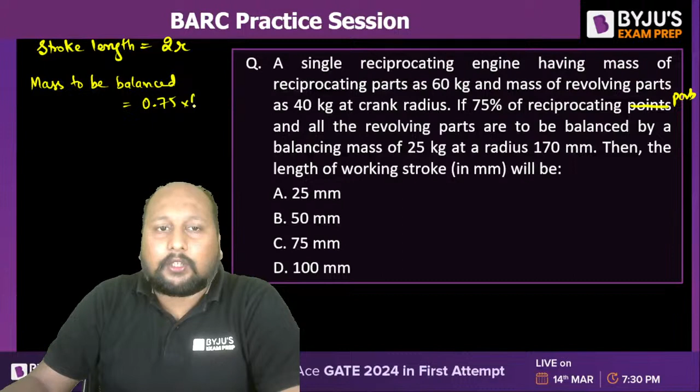Now they are saying that you need to balance 75% of the reciprocating part and the complete revolving part. So the mass to be balanced will be equal to 0.75 of the reciprocating part, that is 60 kg, plus the entire revolving part. So 0.75 into 60 plus 40, what's the value you're having? Anyone? 0.75 into 60 is 45, plus 40, that is 85 kg. Are we getting this to be 85? Fine. So now we need to balance this much mass at crank radius.

They're simply saying you need to go for complete balancing, not any partial balancing. So we can say m into r into omega square is equal to mb into rb into omega square. Now mb is given as 25 kg, and 170 mm is the radius. So 85 into r, omega square gets cancelled out, is equal to 25 into 170. From here I can get the value of r, and then stroke length will be equal to twice of r. See the options and tell me the correct answer.

What's the value of radius you're getting? Quickly. 100. Very good, very good. We're getting r equal to 25 into 170 divided by 85. So this is coming out to 50 mm, right? If this is 50 mm, the stroke will be equal to 100 mm. So the length of the working stroke will be simply option D, 100 mm. Is this clear?

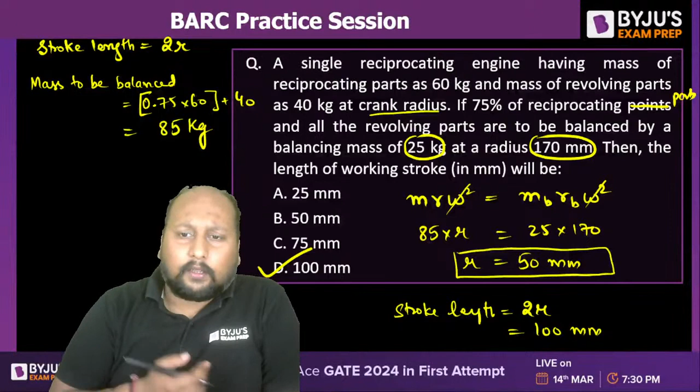Okay, so the next question on your screen is from the gyroscope. An airplane flying at 240 km per hour turns left and completes a quarter circle of 60 meter radius. The mass of the rotary engine and the plane's propeller is 450 kg with a radius of gyration of 320 mm. The engine speed is 2000 rpm clockwise when viewed from the rear. Determine the gyroscopic couple on the aircraft. Okay, chalo, who will be telling me the answer?

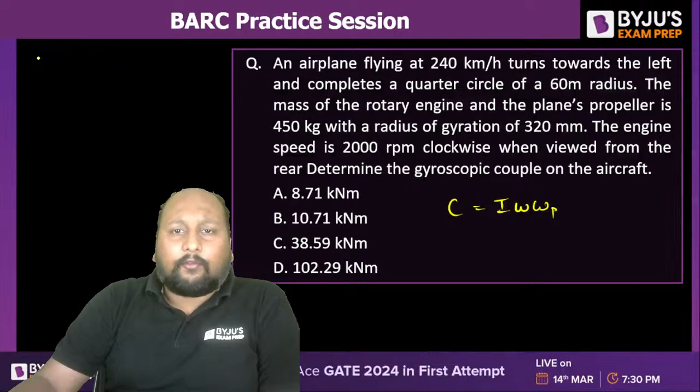It's simple, direct. You need to calculate the gyroscopic couple, that is equal to I into omega into omega p. What's the value of omega? That is 2 pi into 2000 by 60 radian per second. How do we calculate omega p? That is equal to velocity by r, v by r. The velocity is 240 km per hour; convert it into meter per second. So 240 into 1000 by 3600, divided by 60. This gives omega p, and I comes from the mass and radius of gyration given.

So place it: 450 into 0.32 square into 2 pi into 2000 by 60 into 240 into 1000 divided by 3600 into 60. Solve it and you'll be getting something in kilonewton meters. Try to see the unit. Tell me the answer in kilonewton meter. Option A 8.71, option B 10.71, option C 38.59, or option D 102.29. What is the correct answer?

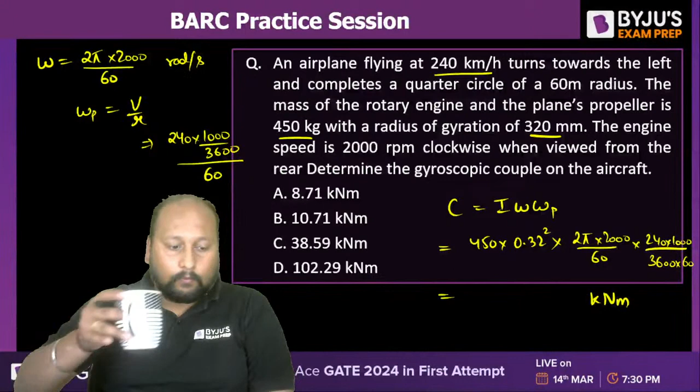Very good, Saurabh. I'm getting some responses from Saurabh and Roshan. Are you getting option B? 10.71.

10.71 or something like this, kilonewton meter. Are we getting option B as the correct answer? Only the calculation part is left. Make sure you're dividing it by 1000 also, in order to convert this into kilonewton meter. Okay, option B. Very good. 10.712, somewhere around that you are getting.

Okay. Yes. Correct. Fire. What's your name? Fire, Roshan, Saurabh, Unstoppable. We are having unique names in the comment section.

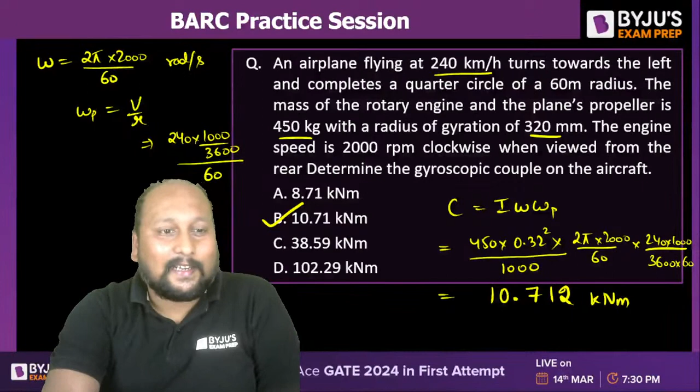Okay, option B is the correct answer. Chaliye, next question on the screen. Again from vibration, let's see. The mass of a single degree damped vibrating system is 8 kgs. If the amplitude of vibration reduces to 1/16th of its initial value after 4 oscillations, that means they are simply saying x4/x0 = 1/16. Then what is the ratio of the amplitude of the third oscillation to its initial value?

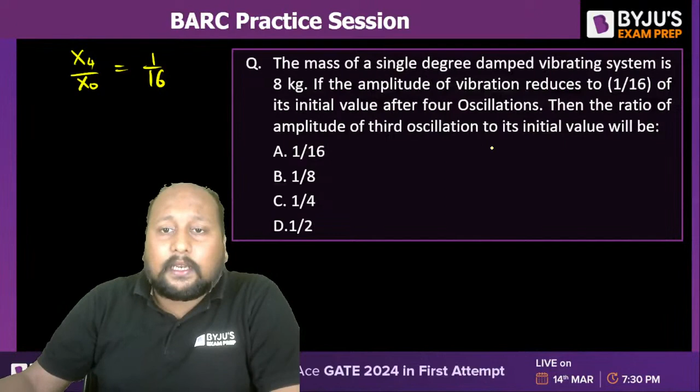That means they're asking the value of x3/x0. Is it coming out to 1/16? Definitely it won't be 1/16; it will be higher than that. Either it will be B, C or D. A you can directly eliminate. You have solved these types of questions so many times in damped vibration. The consecutive ratio is always constant. Okay. Chalo.

What is the value of x3/x0? We know x4/x0 can be written as x4/x3 into x3/x2 into x2/x1 into x1/x0. So this is (x1/x0) to the power 4, because the consecutive ratios will always be the same. That is equal to 1/16. So from here I'm getting x1/x0 = 1/2. But they're asking the value of x3/x0.

So x3/x0 can be written as (x1/x0) whole cube, or 1/2 whole cube, that is 1/8. We are getting option B as the correct answer. No calculator required. Frankly speaking, if you are correct with the logic and the concept, for some questions you won't require calculators. You can directly get the answers. Option B is the correct answer.

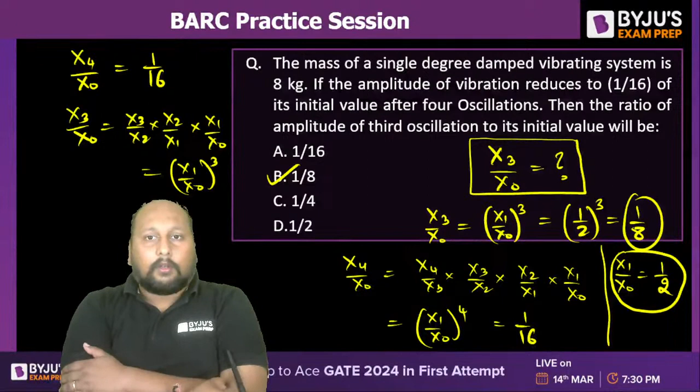Yes, Roshan, Saurabh, Pankaj, I hope this is clear. Is this clear? Option B. Can we proceed to the next problem? It's very important, I need a response from all of you, because you can expect these kinds of very easy questions. The question level is not difficult; the approach makes it difficult or easy.

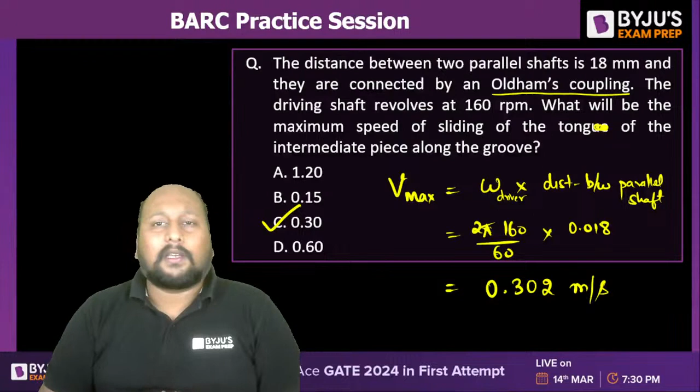Roshan is getting option C. I think we are getting 0.302 meter per second. Round off to option C. Perfect. Okay. Omega of the driver into the distance between the parallel shafts. That's a simple formulation. Those who know, you can apply. Those who don't know, they'll be skipping and losing a very easy 3 marks question. Okay. Chalo, next question on your screen.

Very easy. This question, I would rather say, should be from mechanics, but yes, you can apply the concept of theory of machine also. A wheel of radius r rolls without slipping on a horizontal surface as shown below. The velocity of the center of mass is 8 meter per second in horizontal direction towards right. Towards right means simply like this. Let me use a different color. This is the velocity 8 meter per second and rolling without slip is happening, right?

What will be the magnitude of the velocity at point Q? Quickly, VQ value. Those who know the concept, it will hardly take 30 seconds to answer this question. Quickly.

What is the velocity at this point, VQ? You can use the concept of velocity triangle, or you can use the concept of mechanics. I think mechanics will be very easy. Now, whenever we are having rolling without slip, its I-center will be located at the point of contact. That is, O is the I-center.

So if I want to calculate the absolute velocity, we need to calculate this distance and multiply it by omega. That's it. So the velocity at point Q will be equal to OQ into omega, right? What is distance OQ? They have not given that distance, right? Let me show you that distance.

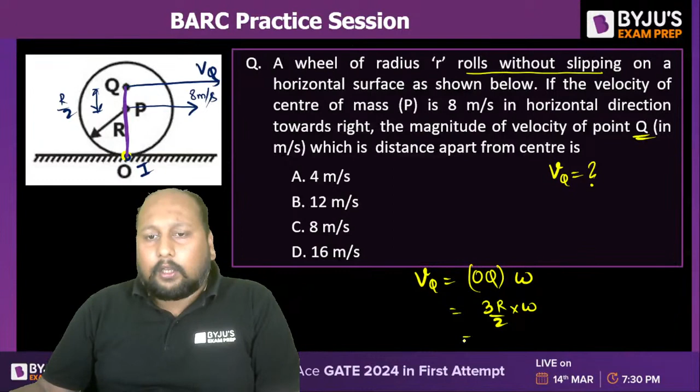What is R omega? Because this is rolling without slip, V is equal to R omega. So we can simply say this is equal to 3 by 2 into V. V is 8 meter per second. So 3 by 2 into 8 gives 12 meter per second. Option B is the correct answer.

Because we know that about the I-center, the body is making a pure rotational motion. So if you want to calculate the absolute velocity, you only have to identify the distance from the I-center to that point, and multiply by omega. R omega is equal to V is the condition for rolling without slip.

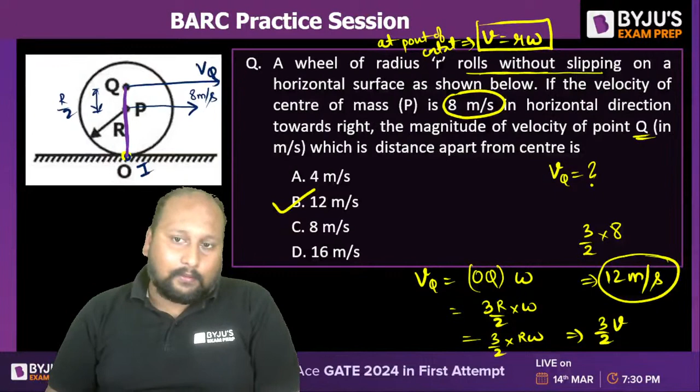You can use that concept and directly get it. Option B is the correct answer. 3 by 2 into 8 simply makes the answer 12 meter per second.

Next question. A rigid rod of length 2 meter is resting at an angle of 30 degree. Various times we have solved these kinds of questions, right? The point B is dragged with a velocity of 8 meter per second towards right. What is the magnitude of the velocity V of point A as it moves along the wall without losing the contact? Quickly, what will be the answer?

They're asking you this velocity, VA. This is given as 8 meter per second. This is 90 degree, so we can use the concept of I-center. The I-center will be simply located at this point. So we can say VA is equal to AI into omega, and VB is equal to BI into omega.

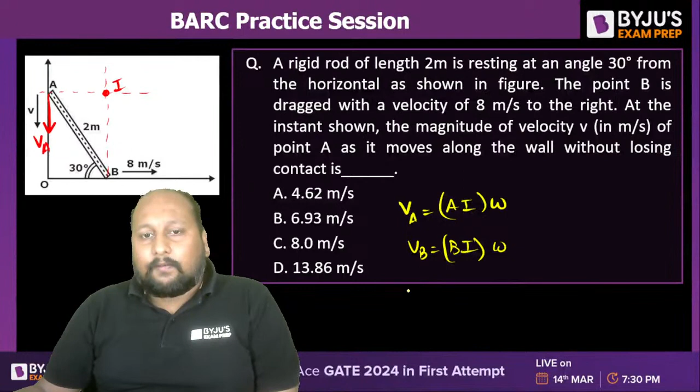Now we can take the ratio: VA by AI is equal to VB by BI. The length of the ladder is given 2 meter. So AI will be equal to 2 cos 30 and BI will be equal to 2 sin 30. Just place it and tell me the answer. Only simple concept. Okay, D option.

Anyone else? I'm getting Roshan, Saurabh, D option. What about the rest of the students?

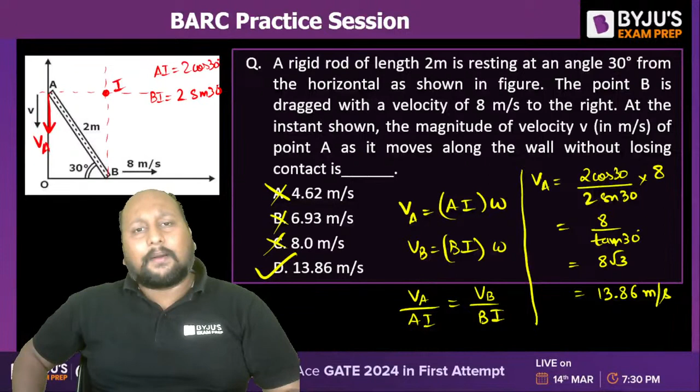13.86 meter per second. Option D is the correct answer. Clear? Yes. Is this clear? Very easy. You use the concept of I center and theorem of angular velocity and you can get the answer.

Okay. Chaliye, next question on your screen, again from the vibration. A machine of mass m equal to 100 kg is supported on 4 springs, each having a stiffness of 10 kilonewton per meter. The machine is subjected to an external force, F equal to 100 cos 10t. The machine is isolated from the floor. Then what is the amplitude of the steady state oscillation? Okay, tell me what will be the amplitude.

Now, can you tell me what is the value of zeta? Anyone? By looking at the question, what could be the probable value of zeta? What is the value of damping factor? As we can clearly see, they are not mentioning anything about damping, and they're also saying that the machine is simply isolated from the floor with the help of the 4 springs. So we can say zeta is simply equal to 0. If zeta equals 0, our amplitude relation becomes very easy.

If I'm not using zeta equal to 0, the amplitude is equal to F naught by k divided by under root of (1 minus omega by omega n whole square) whole square plus (2 zeta omega by omega n) whole square, right? But in this problem, zeta is simply equal to 0. So our amplitude formulation is reduced to a simple format: F naught by k divided by 1 minus omega by omega n whole square.

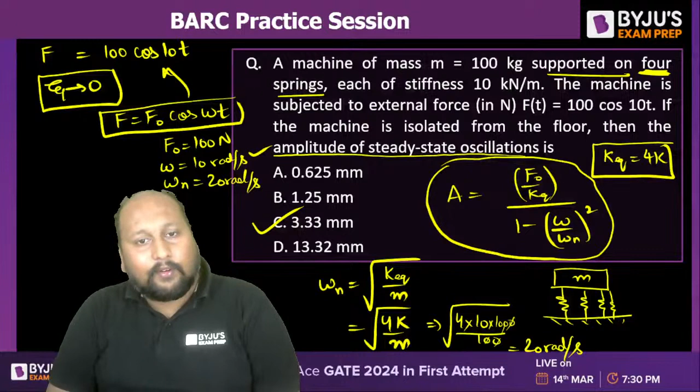The common mistake that some students might be making is in calculating this K equivalent. In a hurry, if you're not identifying this part, you'll get a wrong value, and that wrong value will also be there in the options, so make sure you're not committing this mistake. Option C is the correct answer. 3.33 mm will be the final answer. Okay, clear? Chalo, now let's move to the mechanics part.

Mechanics mein sabse important, one of the favorites is your truss topic. Without truss, mechanics is not complete from any examination perspective. They are asking: what is the number of zero force members in this truss? How many zero force members will be there in this truss? Okay, quickly.

Whenever they ask you these kinds of questions, try to see: is there any joint where 3 members are connected, and out of these 3, 2 members are collinear to each other? If you closely visualize joint B, AB and BD are collinear and BC is alone. So that means BC is a zero force member.

If BC is a zero force member, now if you take joint C, AC and CE are collinear, so CD will be a zero force member. Now if you take joint D, BD and DF are collinear, so DE will be your zero force member. And at joint E, CE and EG are collinear, so EF will be the zero force member. Are you able to understand how, without even taking the pen, we are able to solve this question? Now, how do we need to solve it? Dekho.

If you talk about joint B, this is the FBD. This is a force FAB, and there's a force FBC. If you try to resolve in any component, this FBC will always have a zero value. There is nothing which is supporting this. So we can simply say this is a zero force member.

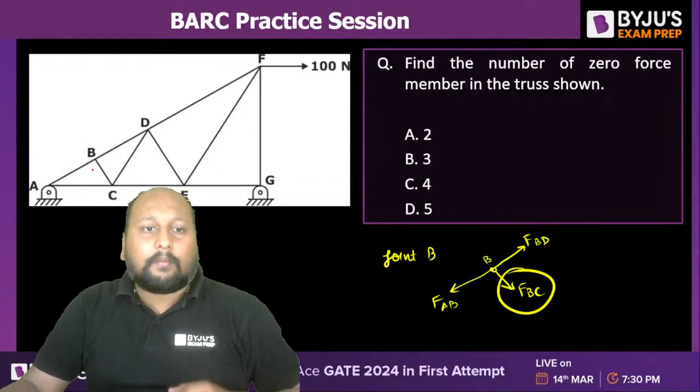If this is a zero force member, now go with joint C, so CD will be a zero force member. Next go to joint D, so DE will be a zero force member. Now let us go to joint E, so EF is a zero force member. So 4 we have identified. Is there any other zero force member that you can see on the screen? Any other zero force member? Yes.

As the force is horizontal, and these are not roller joints, these are pin joints, we'll be having 2 reaction forces here, and 2 here also. Because of the horizontal force we'll be having the horizontal reaction, and if the horizontal reaction is present, we can simply say EG and FG won't be zero force members. So how many zero force members will you get, 4 or 5? Is there any other member having zero force?

Because if you resolve this 100, some portion will go to this, some portion will go to this. If it is going to this portion, we'll have the force over here. And this is non-zero, this is non-zero, this is also non-zero, this is also non-zero. So we can simply say we have 4 members which are zero force members. Is this clear? No, EG won't be zero. Why?

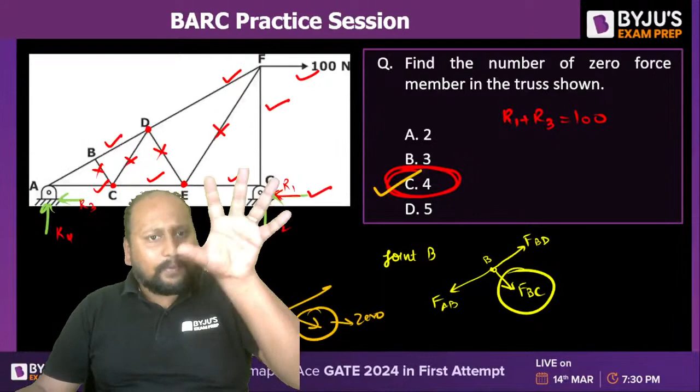Clear, right? Simple. You only need to identify the collinear forces. Whenever you see 3 forces like this one, this one, and this one, definitely this will be a zero force member. Simple way to identify. No need to do the complete calculation by method of joints or method of sections. By simply looking at the diagram we can identify. Okay, chalo, next question.

A force of 70 Newton acts tangentially at the highest point of the solid sphere. We are having a solid sphere, right? And a force of 70 Newton is acting at the highest point of the solid sphere with a mass of 10 kg kept on a rough horizontal plane. So we're having a horizontal plane, right?

And it is rolling without slipping. What is the magnitude of the acceleration of the center of the sphere? Chaliye, try this problem. Very easy. Now, can you tell me what's the direction of friction at the point of contact? What will be the direction of friction?

Because it is moving, it will be moving definitely like this. So the direction of friction over here will be this one, in the right hand side. Okay. So if you simply look at this particular sphere, there are two forces acting. One is the applied force, second is the friction force. If you apply D'Alembert's principle, I'm assuming this is moving with an acceleration of A. So this is the acceleration A.

So we can say F plus small f is equal to m into A. So there are two forces acting, right? Okay, fine. And if I try to apply the torque equation, this is applying a torque in the clockwise direction, F into R. Small f into R is applying the anti-clockwise, so F into R minus f into R is equal to I into alpha, right? And we know that A is equal to R into alpha.

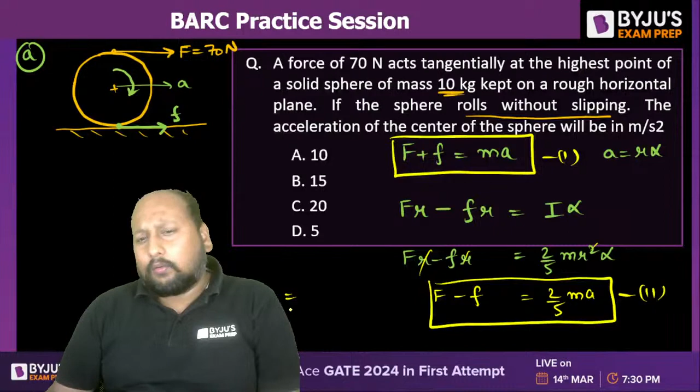So we got two equations, this one and this one. Try to add equation 1 and equation 2. If you try to add, f will be cancelled out. So we'll be having 2F is equal to 7 by 5 mA. We know the value of F, we know the value of m, we can calculate the value of acceleration. So A is equal to 10 into F, which is 70, divided by 7 into mass, which is 10 kg. So we are getting this to be 10 meter per second square.

Option A is the correct answer. 10 meter per second square. We are simply getting this value. Fine. It's quite easy. Only thing is you need to apply the simple logic. That's it. Okay, chalo. Next question.

I think mechanics में many of the students are not able to respond. अरे mechanics बहुत easy है. It's only pure physics, how we are able to apply the physics. Remember when you are preparing for JEE, you are solving very high level of questions. These are very basic level, I think. Chalo, one more type of question.

A ladder AB is having a length of 5 meter and weight of 600 Newton is resting against the wall. Assuming frictionless contact at the floor B and wall A, what should be the magnitude of the force P that we need to apply in order to maintain the equilibrium? Okay, chalo. Tell me, what will be the answer? Apply.

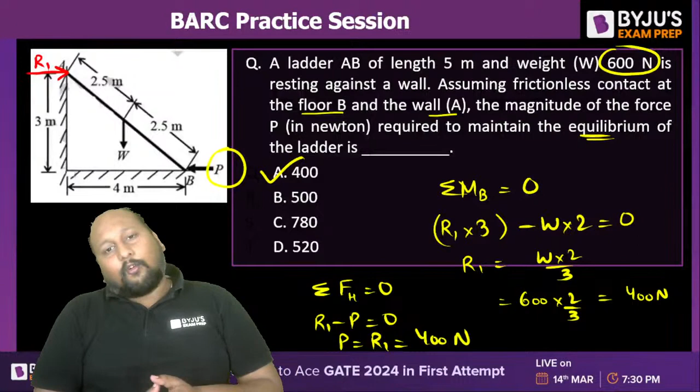And if I say the total force acting on this body in the horizontal direction should be equal to 0, so we can say R1 minus P equal to 0, or P is equal to R1, that is equal to 400 Newton. Option A is the correct answer. Pankaj has already given me the answer. Yes, I think he has given the previous one. Okay, so 400 Newton is the answer to this question. 400 Newton.

Pankaj, Roshan, Saurav, is this clear? Everyone. Two, because they are saying equilibrium condition, the total moment will be 0 and the total force acting on this body, because that is the criteria for an equilibrium condition, right? Only we have applied these two criteria. That's it. These two conditions. Okay.

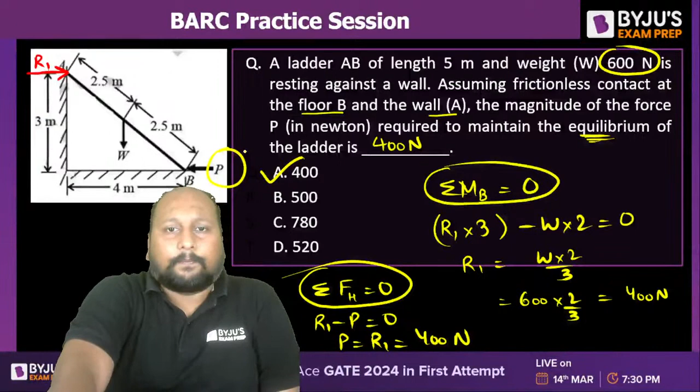Chalo, next question on your screen. If a ball which is dropped from a height of 2.25 meter on a smooth floor attains the height of the bounce equal to 1 meter, the coefficient of restitution between the ball and the floor is equal to, there's a direct formulation. Remember, collision topic we have seen, if they are giving consecutive heights, we can directly get the value of coefficient of restitution. Yes, anyone?

Quickly, initially it was having a height of 2.25 meter, and after the first bounce it has attained 1 meter. Okay, so from here we can simply say e is equal to under root of h2 by h1. H2 is 1 divided by 2.25, root of this. So when you solve it, you'll be getting somewhere around 0.67. Very good. So the coefficient of restitution will be 0.67. Option C is the correct answer. Is this clear? Done.

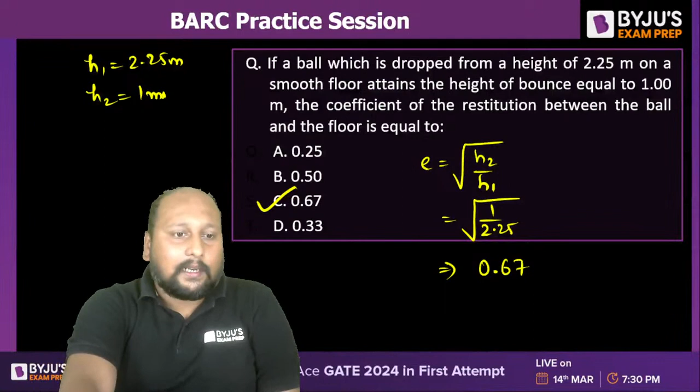Chaliye, next question, industrial questions. Let's take out some industrial questions. Okay, from the assembly line, quickly tell me the answer. I'll be back in a minute. Quickly, I need answers.

Okay, chalo. The assembly line of 5 stations have 5 different times. They are simply asking the value of line efficiency. So the line efficiency is equal to the total work content divided by n into the cycle time. But here they have not given the value of cycle time. Then how we can calculate? Whenever they are not giving you the cycle time, we have to assume the cycle time is the maximum among all the given parameters. So the cycle time will be equal to 22 minutes.

Total work content will be the addition of all these, that is 20 plus 16 plus 19 plus 22 plus 17. Okay, Roshan, absolutely correct, 87.27. This will be coming out to be 96. So 96 divided by number of workstations, 5, into 22. You solve it, you'll be getting exactly 87.27 percentage. Into 100 you need to multiply, because it's asked in percentage. Option D is the correct answer. 87.27 will be the total line efficiency.

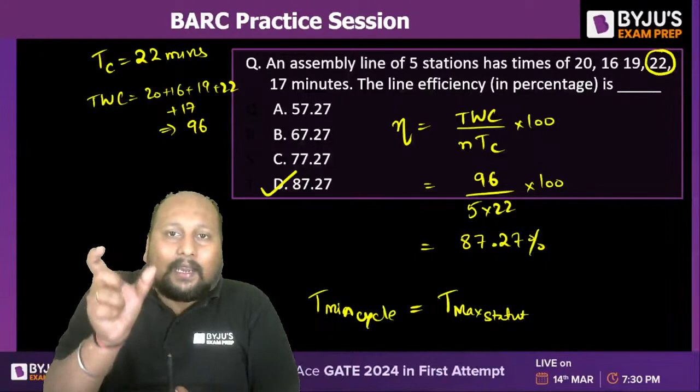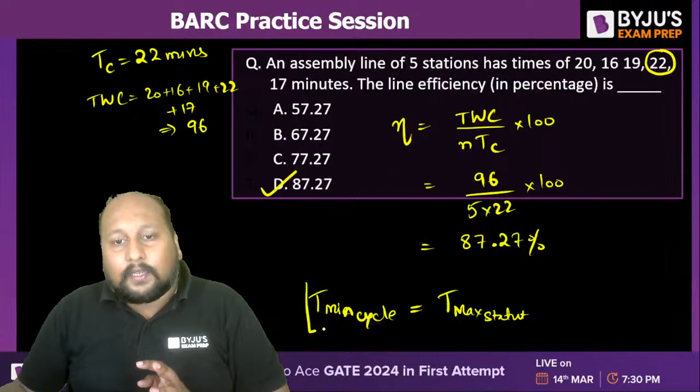If you're having 5 stations with, let's say, 20, 16, 19, 22, 17, I will be having a cycle time of 22 minutes, because that job will be remaining in that workstation for 22 minutes. If I'm assuming the cycle time is 16 minutes, then it is staying for 16 minutes only for workstation 1, but it requires 20 minutes to complete all the processes. So that should not be the value. So minimum value of the cycle time is nothing but the maximum station value. Okay, chalo.

Next question. 3 machines are required to perform machining processes on 3 different workpieces. So time is given. The optimum allocation to minimize the total. They are asking you the allocation. That means this is a question from the assignment problem, from the assignment model. Chalo, quickly. Minimization. So you need to apply the Hungarian method to identify the optimum allocation for the minimum total process time. Hai na? Chalo.

Row reduction, then column reduction, then we'll be getting the final value. So if I go for the row reduction, the least value will be subtracted from the individual rows, right? So 3 is the minimum, so 0, 1, 4; 2 is minimum, 3, 0, 0; 3 is minimum, so we'll be having 6, 1, 0. For the column, if you clearly see, in every column we're having a 0, so now we can go for the allocation. I hope everyone knows how to do the allocation.

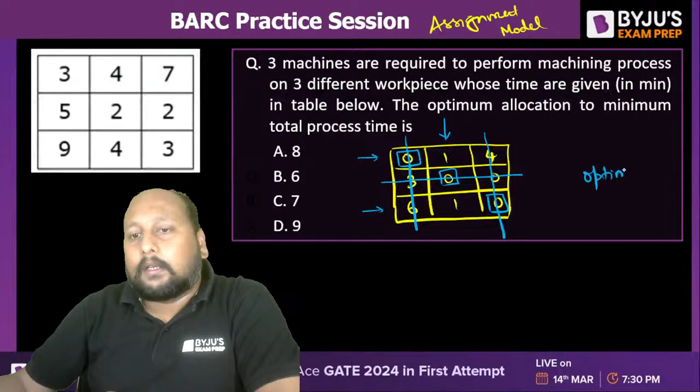Hello, Bhagwat. Row number 1, single 0, allocate and strike the column. Row number 2, 2 zeros, we won't be allocating anything. Row number 3, single 0, allocate and remove that column. And if you move to the column, allocate. So here, 3 lines are required to cover all the zeros, so this solution is optimum. So my final answer is 3 plus 2 plus 3, that is option A, 8, not 6. Okay.

Yes, option A, 8 is the correct answer. Simple. Very good. We only need to do the allocation.

Row number 1, single 0, allocate, strike that column. Row number 2, 2 zeros, leave that. Row number 3, single 0, allocate, strike that column. Now move column wise. If you move to column number 2, only a single 0, allocate, strike off that column. So 3 lines are required to cover, and that is equal to the size of the matrix. That means the solution is optimum. We have allocated all these 3 values. So 3 plus 2 plus 3, that is 8 minutes will be the optimum value.

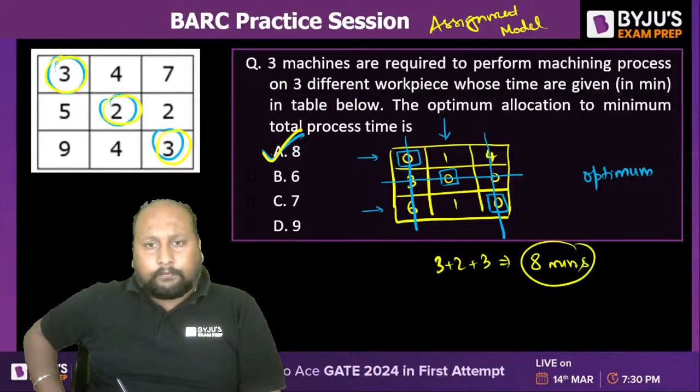Chaliye, next question on your screen. This is a question from sequencing. A company has 3 machines, A, B, and C, and there are items and their processing times are given. What is the optimum sequence? Quickly. To apply Johnson's rule, there is one condition. The minimum of A should be greater than or equal to the maximum of B, or the minimum of C should be greater than or equal to the maximum of B, right?

So chalo, let's try to apply. Minimum of A is 3 and maximum of B is 6. Condition is not satisfied. Minimum of C is 6 and maximum of B is 6. Minimum of C is greater than or equal to maximum of B, so this condition is satisfied. Now we can convert this into two machines. Let's say I have hypothetical two machines, X and Y. X equals A plus B and Y equals B plus C. Then you can apply Johnson's rule.

So 4 plus 4 is 8, 6 plus 4 is 10, 9 plus 5 is 14, 9 plus 5 is 14, 8 plus 3 is 11, 3 plus 11 is 14, this is 8, this is 10, 9, and this will be 13. Okay, so we have converted this from 3 machines to 2 machines. Now we can do the allocation. Johnson's rule lagaiye. Quickly apply Johnson's rule, simple question. Chaliye, easy hai.

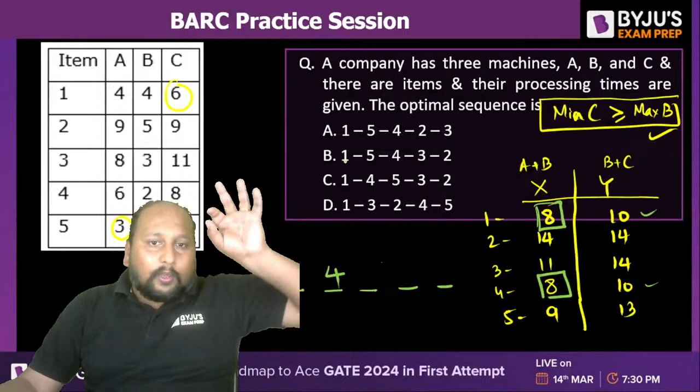1, 2, 3, 4, 5. A, B, C, D. Okay, Saurav and Roshan have given me the answer. Now, you can allocate 1 and you can allocate 4 also because both the values are the same. So it is independent whether you have 1 or 4, both are correct. So let me take 1 first because it's starting with 1. Then we'll have 4, right? So by only looking at these two answers, we can eliminate A, B and D. Option C is the correct answer.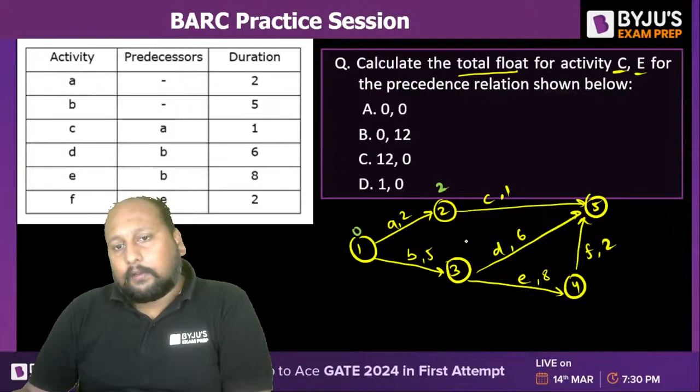A has a duration of 2, B 5, C 1, D 6, E 8, and F 2. Let us quickly identify the critical path with the forward pass and backward pass computation. 0, 0 plus 2 is 2, 5, 2 plus 1 is 3, 5 plus 6 is 11, 5 plus 8 is 13, 13 plus 2 is 15. So the critical path is B, E, F. If this is the critical path, they're asking about activity C and E.

E is on the critical path, so E will have a total float of 0. So option B is eliminated. Now we are left with A, C and D, so we have to calculate it. Forward pass and backward pass, and they are asking about activity C. So this is 15. 15 minus 1 is 14. So activity C is moving from 2 to 5.

2 to 5, right? 2, 14, 15 and 15. Total float is equal to 15 minus 2 minus C's duration, which is 1. So this is equal to 12. Okay, so 12, option C.

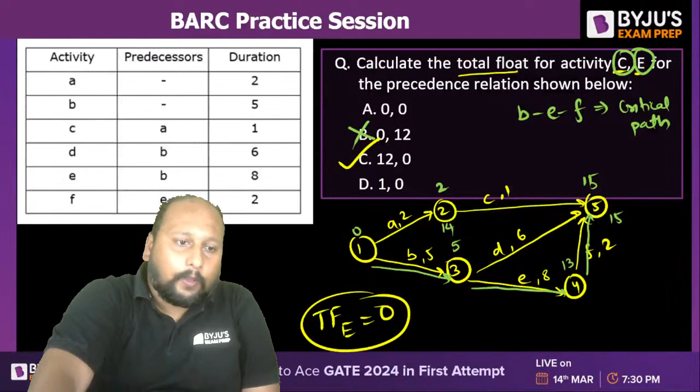Because see, total float for E will be simply equal to 0. Why? Because it is located on the critical path. Since it is on the critical path, it will definitely have a 0 value. Total float, independent float or free float, you'll be getting the direct value to be 0. So option C is the correct answer. Okay, correct. Very good. Let's go, next question.

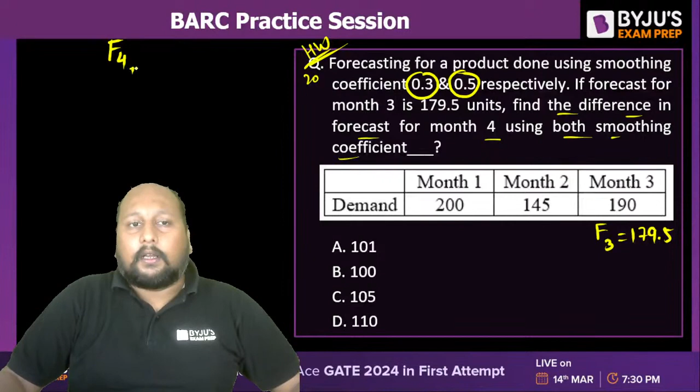Okay, so whatever value you are getting, tell me the final correct answer. And I think that option is not correct. These options are from the previous one. You'll be getting somewhere around 2.5. Please cross check. 2.5 units. 2.5 or 2.1.